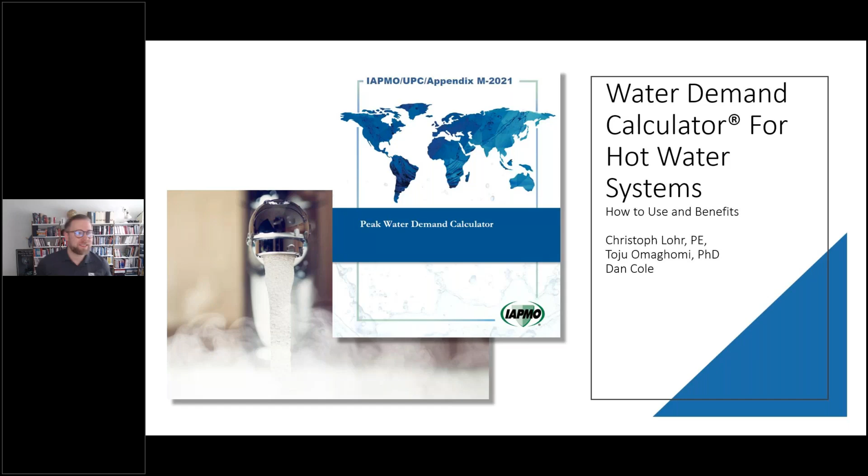Unfortunately, Dan is not able to join us today. We were hoping that it would work out, but he is actually attending the WE-Stand technical committee meetings.

And the WE-Stand is actually one topic that maybe some of you folks haven't heard of before. It really is a very remarkable ANSI standard that IAPMO develops, a bit of a stretch code if you will, that really tries to provide requirements to optimize water use practices while maintaining protection of public health, safety, and welfare. So that's right in the purpose of the document.

One of the things I've really loved about WE-Stand, I think from the engineering standpoint, is I see the opportunities to put this as there's lots of things about water reuse, the water demand calculator, hot water ratios, leak detection devices, and a plethora of other topics around water use.

And it's a really wonderful topic because it really balances well the public health and safety and the efficiency of water use in buildings. So sometimes we've had situations where standards have come out as an industry that have promoted practices perhaps that haven't led to safety, while trying to optimize water use or energy usage.

And this is really one of those documents that just, as I've come to spend the time here in my last almost 5 years at IAPMO, I have learned about this. If you're not familiar with it, highly recommend you guys go check it out. Max, thank you for putting that link in the chat.

So we'll just be Toju and I today. Here's a rough introduction or rough objectives that we have.

So we're going to spend a little bit of time on the introduction to the water demand calculator. How can design professionals use the water demand calculator, showing some of the results. And again, we're going to do a very high level today, so this is going to be a bit of a quick breeze through.

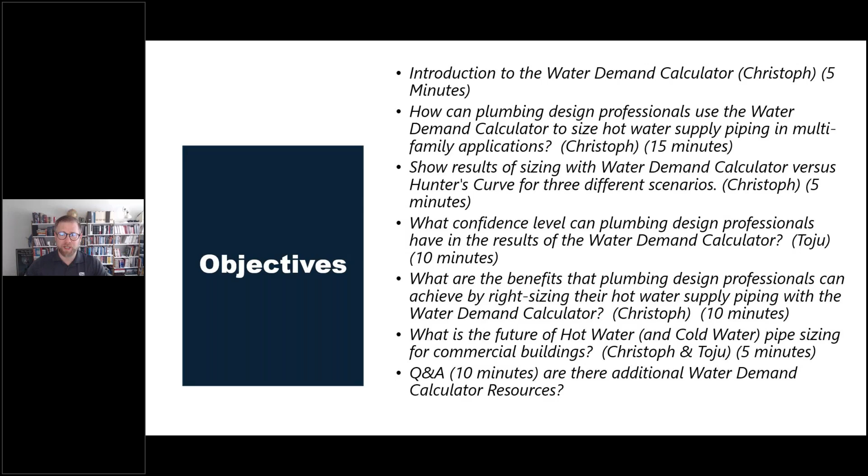And really what that comes from is a question that Dan Cole asked very early on, which is, what is the problem with the Hunter's curve? Even though the Hunter's curve has adjusted some of the flow rates and fixture unit values down because of more efficient water fixtures, the problem is that the fixture unit has two criteria inside that number: one is the flow rate of an individual fixture, but the other is a probability of simultaneous use. And really what it boils down to is that we're using something from the 1940s that assumes every home operates like a sports stadium at halftime.

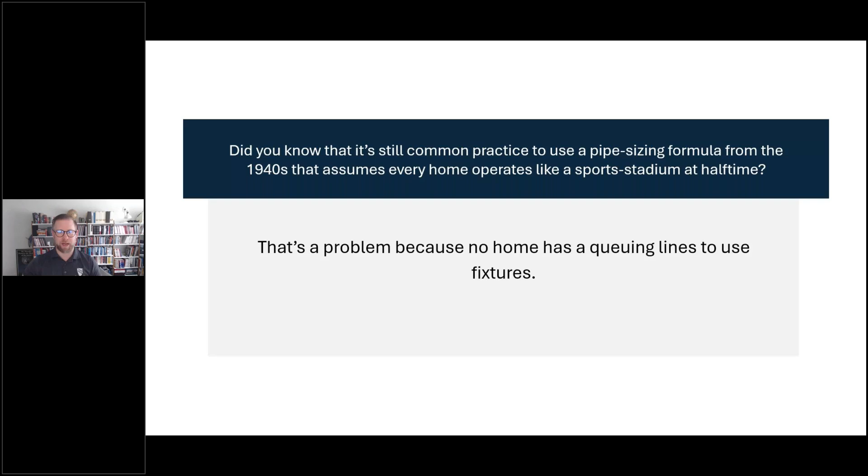So let's dive into that a little bit. Roy Hunter was commissioned by the U.S. Department of Commerce back in the 1940s to develop a way to size piping systems, a more standardized unit. What he came out with was BMS 65. Many of you have probably heard of that. And that particular report is what we've basically used as an industry ever since 1940.

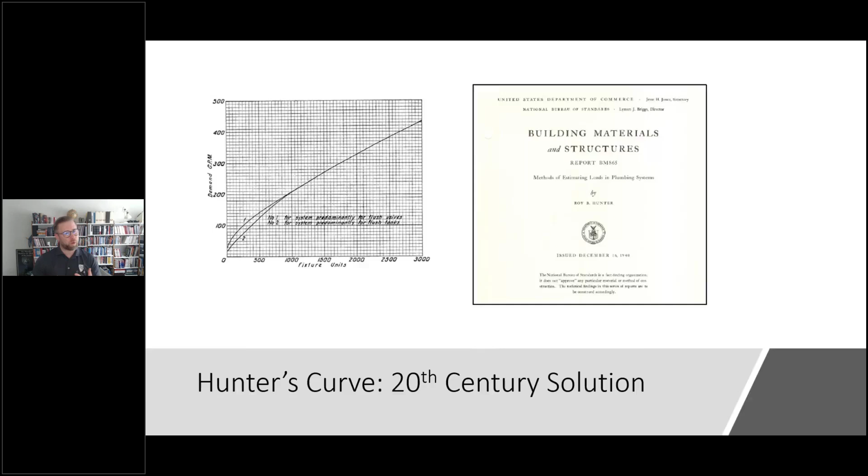Now, Dr. Roy Hunter had very limited means compared to present day in terms of what he could do in estimating peak flow rates. First off, we have to recognize he did not have a computer, let alone a calculator, to do any of the calculations with — he had a slide rule. And the other part is he had very limited data, and he had to make some assumptions to make the mathematics a little bit easier in terms of statistics and probabilities.

And that's all the information in terms of statistics and probabilities. Why I'm so glad Toju's here — she can definitely provide a lot more context to those questions if you have them. So put those in the chat now, and then we'll want to make sure to address those later on.

Now, obviously, that kind of a line really only happens in assembly-type occupancies. So we're talking about airports, maybe when they come in, sports stadiums most certainly at halftime, an opera house or a movie theater at intermission — you're talking about congested use. But Dr. Roy Hunter made that assumption for all buildings because he didn't have the data, and he had very limited means to making that calculation.

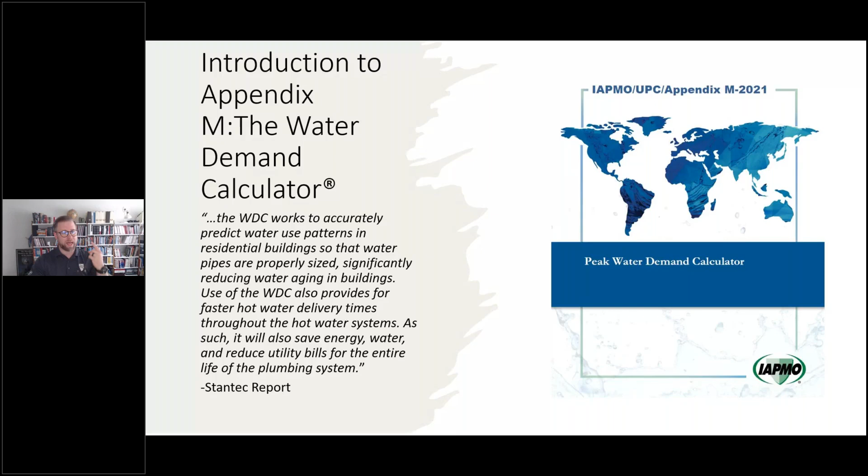And that's where we have this new way of sizing or estimating peak flow rates, which can be used to size a pipe. So let's touch base real quick and make a clarifier: the water demand calculator doesn't size a pipe directly. However, there are two main criteria when you size a supply pipe in a plumbing system - the available pressure, which is independent of the peak flow rate, and then the peak flow rate itself. That's what we use in the plumbing industry. We're not using average volumes or other things. We need to know what that 99th percentile peak flow rate is. Toju can give you more detail on that during the Q&A section.

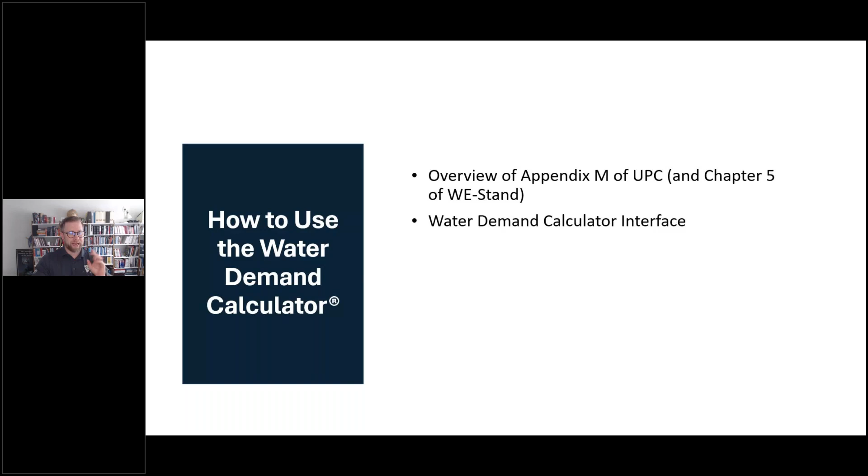So when you look at the water demand calculator, it exists in two particular standards. One is the IAPMO ANSI standard WE-Stand, now ongoing into the 2026 edition, and the other is the Uniform Plumbing Code, which we're just finishing up the 2027 edition, where it still exists in Appendix M. Also worth noting is that with these standards, there's a separate Appendix M adoption, which some states like Wisconsin have done as well.

Right now, the water demand calculator has been adopted in at least 10 states. There are 2 more states that have already approved it, but it won't go into effect until later this year. And then we have a smattering of other cities and jurisdictions that have adopted it, and some cities have started to mandate the use of the water demand calculator, which is rather interesting.

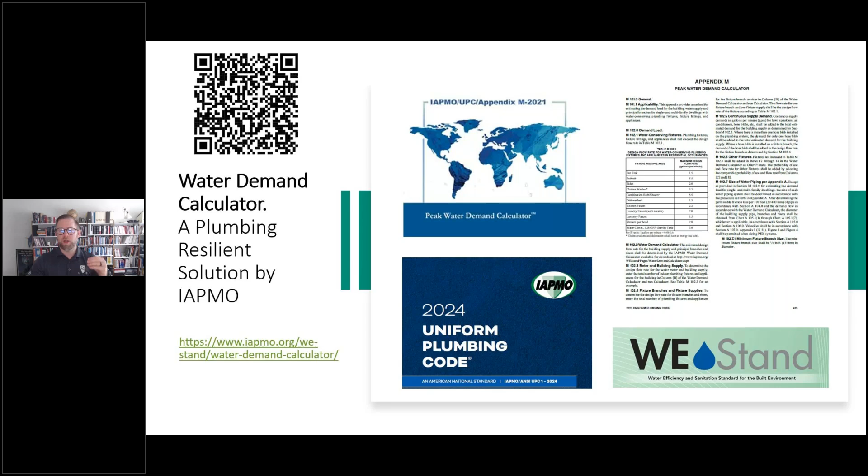Worth noting, just like other codes and standards, the water demand calculator is a free download. If you go to this website, there is a free version of the calculator, and there will always be a free version. In Excel, you do have to enable macros, but it's free to use. We have detailed instructions included, so if you need to work with your IT to get the macros to work, please do. But once you have that version, it's pretty straightforward to use.

So just some quick features and functions. Again, that QR code will take you to the website to download the water demand calculator, and it has a host of other resources around it. First off, make sure you're using the latest version, 2.2.

We have a project name and then a drop-down menu, which I'll address in just a moment. It will show the date you ran your calculation, your fixture groups, which include bathroom fixtures, kitchen fixtures, laundry room fixtures, bar prep fixtures, and then other. Then you have your individual fixture types, listed as such in each of those groupings. You enter your total number of fixtures.

The white cells are cells that you can go ahead and modify or edit. You have a probability of use, which remains unchanged or is automatically done, especially for multifamily that shows up there. If you're doing an other fixture, you can pull from the probability listed above. And then you have a fixture flow rate, GPM, that you can modify.

Now, at the current time, you can't go above the fixtures because the water demand calculator was built utilizing high efficiency fixtures as part of WE-Stand. However, we do have a committee looking at potentially elevating those peak flow rates for future versions of the water demand calculator. So stay tuned on that.

And then this last row is just a reference row in terms of what the maximum fixtures are. Here's where your outputs occur, including your total number of fixtures in your calculation, and what your 99th percentile demand flow is - that shows up right there. Your Hunter number, which references back to some of Hunter's curve pieces. The stagnation probability is a wonderful number that Professor Steve Buchberger and Toju Omaghomi came up with, especially in this age where we have to consider water age, water quality, and water management - that's a good number to look at. And then the method of computation.

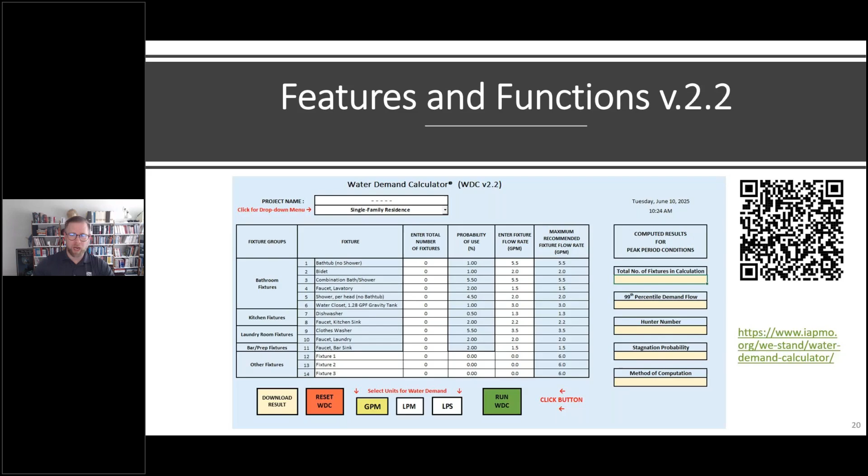Now, worth noting, there is the single family option, and there's a drop-down menu highlighted in red. If you're doing multifamily, like a line coming into an apartment complex or condo, when you select multifamily, you have to include the total number of apartments in the building and the total number of apartments in that particular calculation run.

That's vital because it changes the probability of use. One of the things Toju and Steve discovered when looking at multiple dwelling units is that the more dwelling units you have, the likelihood of simultaneous use goes down. So for larger buildings with multiple apartments, you'll see a lower flow rate output for more dwelling units when those bathroom groups are split into different dwelling units. That's a key function here, and that's really where that behavioral pattern from one home to another starts getting shifted.

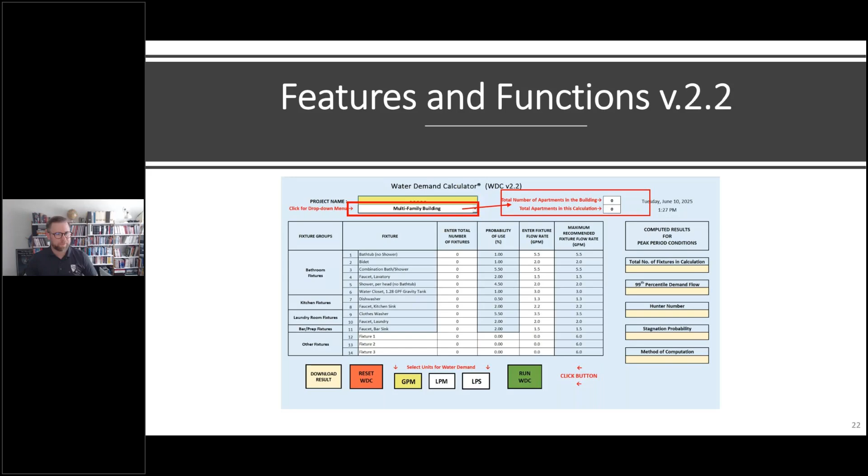Max, I just saw a hand raised, I think. I'm not sure—do we want to do questions at the end, or during? Yeah, we can do them at the end. If you want to type a question that pertains to a slide, the easiest way to relay that is to type it into the chat, and I'll see if I can keep up with those, or we'll get back to everybody if we don't get to a bunch of questions by the end.

Perfect, so just a real quick summary—we had to condense it for the purposes of this presentation. The first thing when using the water demand calculator is recognizing that it currently only applies to residential buildings, whether single family or multifamily.

If you have a mixed use building with shops on the bottom and apartments on top, you can use the water demand calculator for the apartments upstairs, for those areas downstream. However, for your combined water service entrance feeding both, you take your water demand calculator for the residential occupancies, then use Hunter's curve for the commercial spaces, and add those numbers determined independently together to come up with your total flow rate for the combined service serving both the mixed use and multifamily.

We are working on retail spaces too, so hopefully soon we'll have a way to package it all up in the water demand calculator, but it's going to take some time. More on that later.

Again, you need to have water conserving fixtures, and riser diagrams showing the pipe segments. I highly recommend doing that riser diagram to show your peak flow rates segment by segment. Then it's just following Appendix A from the UPC, the longest length method—you do your friction loss calculations based on available pressure and longest length to get a PSI per 100 lineal feet. You do your pipe sizing chart, plug in that water demand calculator demand based on your available flow rate for your pressure loss PSI per 100 lineal feet, and that helps you select your pipe sizes.

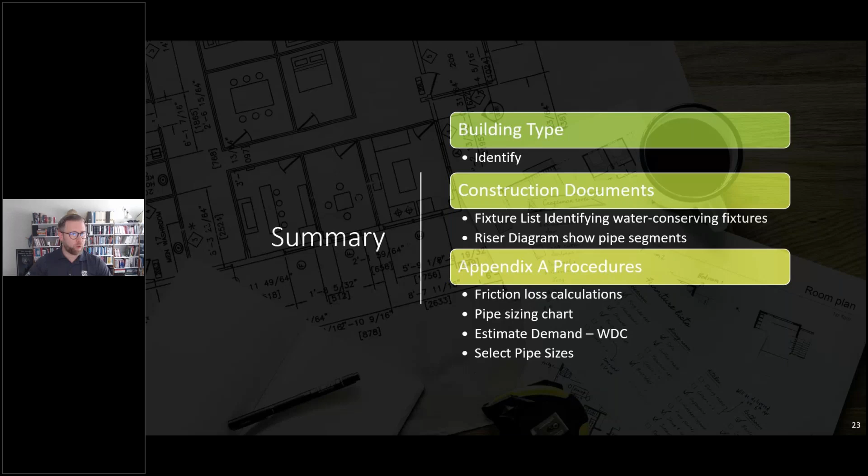So to show a quick example of how that works—if we're doing a pipe sizing method for hot water, in this case utilizing a pressure drop of about 15 PSI per 100 lineal feet, and using the charts in Appendix A, you'll see that a half-inch line has a maximum hot water demand GPM of 3.5 GPM.

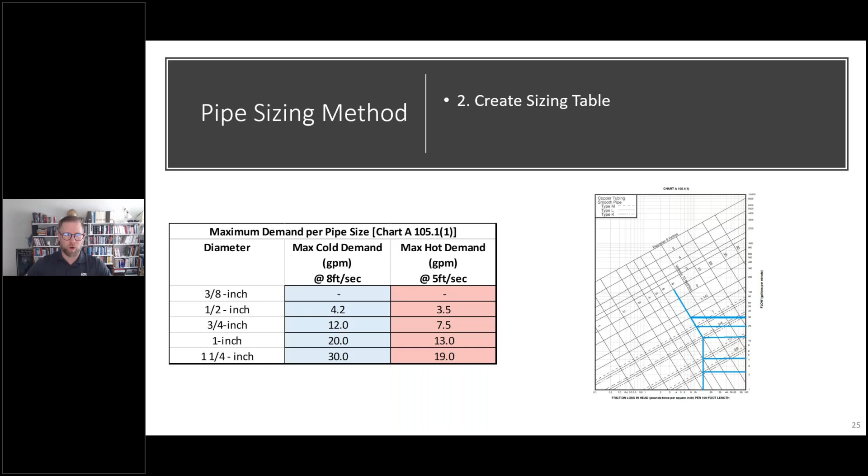Again, you're lowering that feet per second due to velocity limitations of copper in this case. 3/4 inch goes up to 7.5, 1 inch goes to 13 GPM, and 1 1/4 inch goes up to 19 GPM. So when sizing your hot water supply coming out of the water heater, you'd put in those flow rates for each segment of pipe, then go back and refer to the chart to come up with your size.

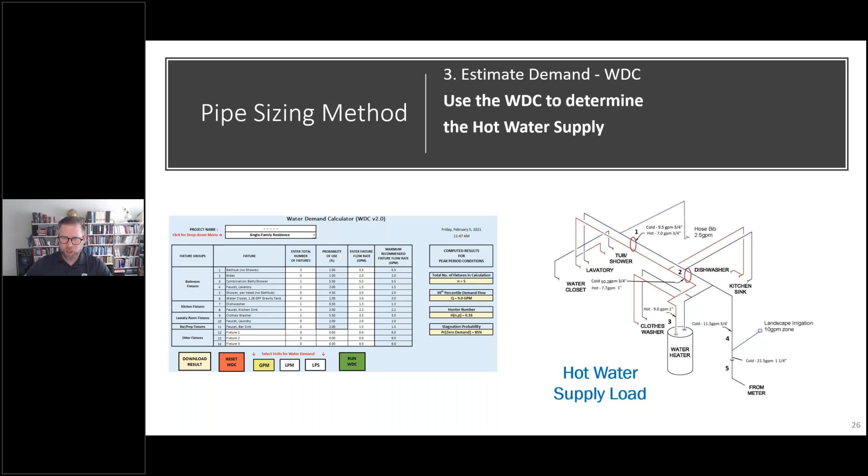So for pipe segment 1, which is the combined main serving the lavatory and the tub and shower, you have 7 GPM, so that's a 3/4 inch.

Going back a little further, that combined main for that bathroom plus the kitchen sink, the water demand calculator estimated at 7.7 GPM, which equates to a 1 inch pipe in this particular example.

Going back further, getting closer to the water heater, you have the clothes washer, which gets you a GPM of 9. That hot water pipe size would be 1 inch. That's just looking at the chart we created before, and what the water demand calculator creates for each one of them.

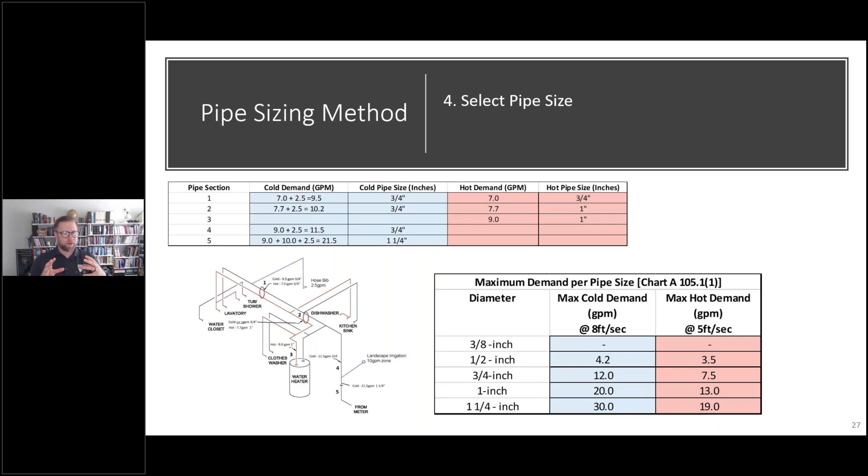Now, when you have just an individual dwelling unit or single family home, typically the pipe sizes mimic pretty closely to what Hunter's curve does. But when you start scaling up to multifamily, you're going to see reductions in pipe size. This is a particular example.

That QR code takes you to a YouTube video. Our colleague Randy Lorge, a master plumber out of Wisconsin, did this for our IAPMO San Antonio conference in 2023, and we got a recording of it. He goes through and breaks this down for a whole specific multifamily application for cold and hot water.

But looking at pipe segments 12 through 20, just the hot water side, when you look at the total potential simultaneous use for each segment of pipe, table 610 and appendix A by itself, which basically follows Hunter's curve sizing, estimated a 1 1/4 inch line coming out of it was necessary. The water demand calculator only required a 1 inch line.

So generally speaking, when you're doing multifamily, about 95 to 99% of the time the peak flow rate that the water demand calculator comes out with is going to be lower than Hunter's curve. Sometimes you get a bit of an anomaly where the water demand calculator is slightly larger, but generally speaking you're going to be smaller.

Where you really see this, let's say you have a 100 unit apartment complex, the cold water line coming in may go from a 4 inch down to a 2 inch. So let's say your hot water was a 3 inch makeup to the water heaters, you might be able to get away with a 2 inch or 1.5 inches.

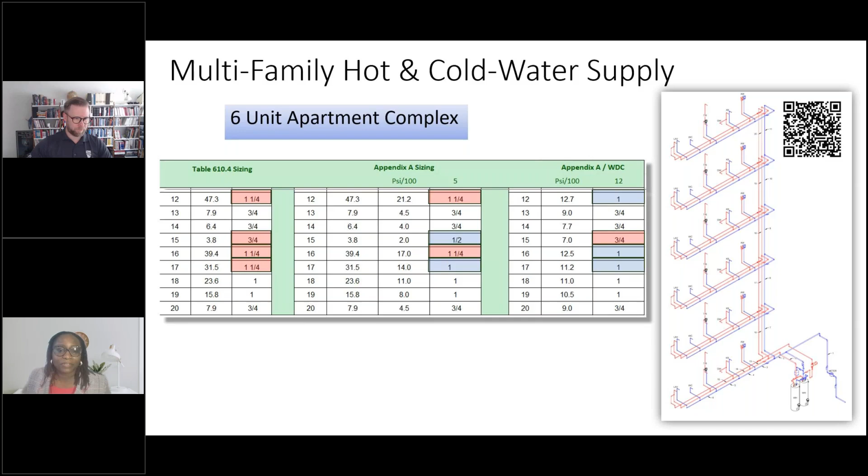So everybody knows about Hunter's curve, and then we come out with this water demand calculator, and it's not a simple plot. Everybody was asking why don't we just have a straight line? Well, we can't, because we found out that depending on the size of the building, it requires a different method and different parameters.

And so people are concerned because we now have these very small numbers, and they're like, how did we get it? Next slide.

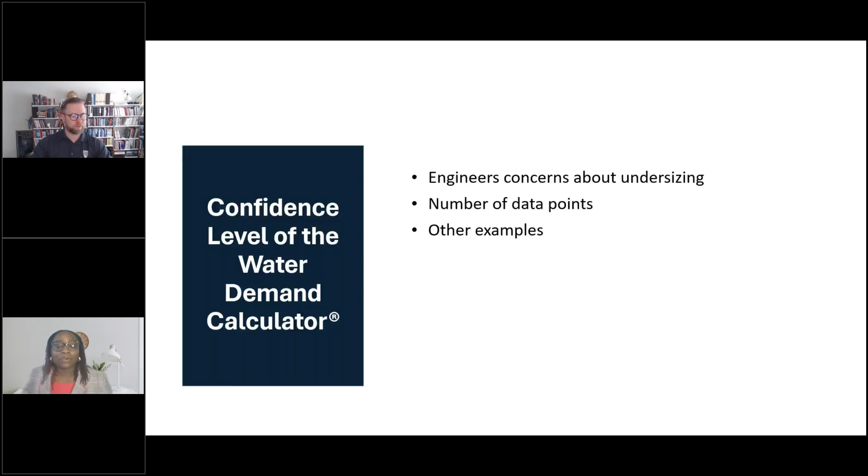So what went into the water demand calculator was data from over 1,000 residential buildings across 9 states, 62 cities. We looked at where and when water is being used in these homes. The data told us that at 7:30, the faucet is on, the shower is on, the toilet is on, so we can see what is happening at individual fixtures and for how long they were used, and we were able to calculate the probability that water is flowing at the individual fixtures.

We also used the same data to assume that each residential building is a unit in a multi-apartment building, and we found that as the number of units increases, the probability of peak hour use for these fixtures reduces, because not all of the homes are in simultaneous use at the same time, as we would have in a stadium where everybody's using the fixtures at the same time.

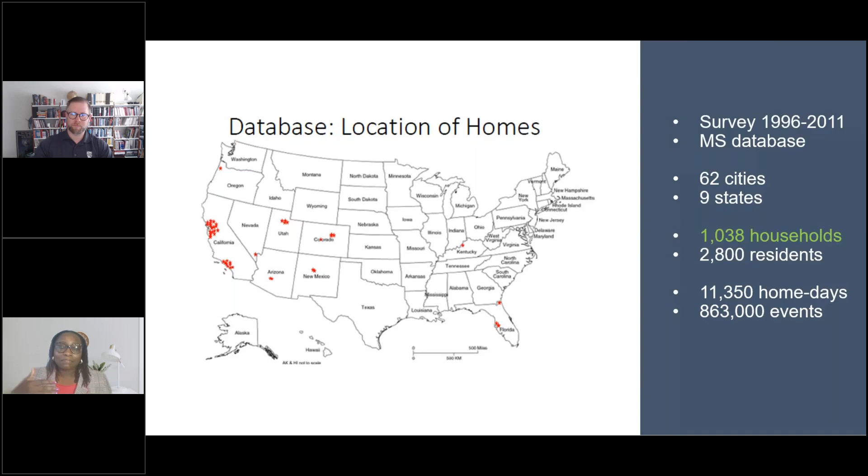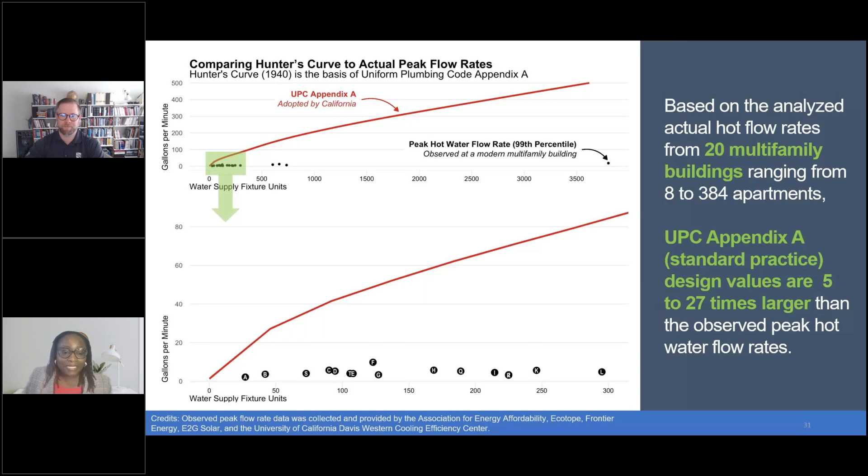In this plot, we compare what is being measured against what it was designed for, which is red, to the water demand calculator, which is blue. What was measured is black. The highest we see is about 20 GPM from a building with 384 units. The water demand calculator is at least close to reality compared to the red lines, which is what they would have used to design the system. Depending on the size of the building, this difference increases, which is what we're noticing. At the end, the last 4 buildings, they could not even put the data point for the design on the plot because it was way out of range.

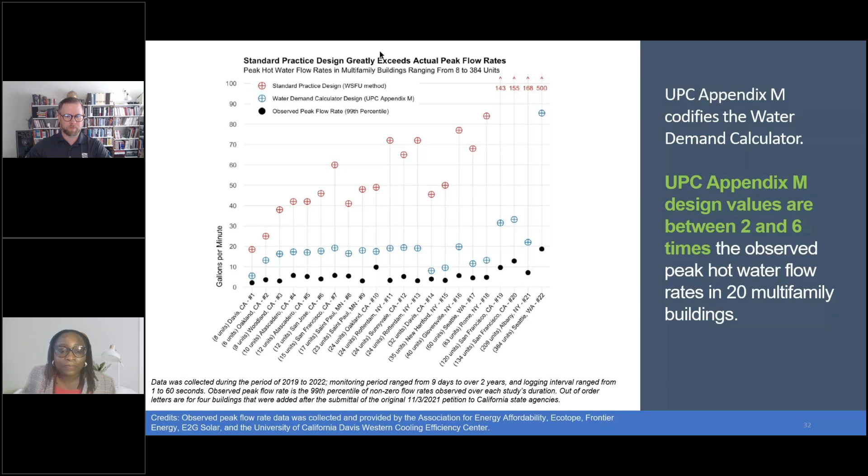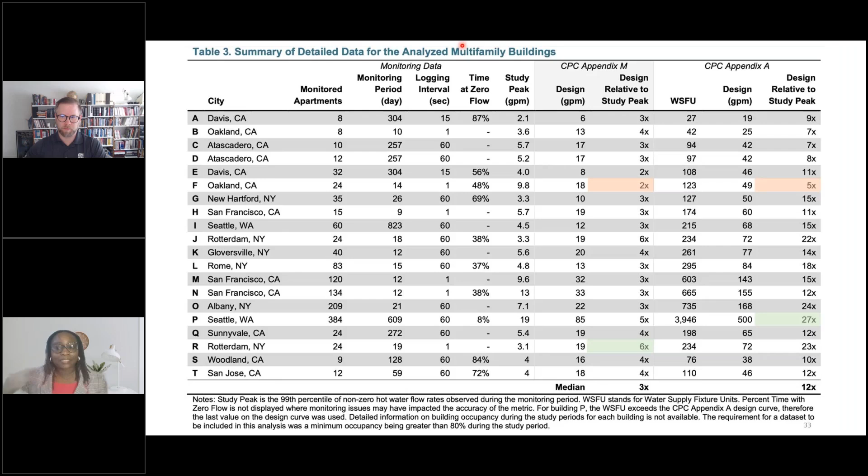I want to draw your attention also to the time of zero flow, because in these residential buildings, most of the time people come and go, and there's a whole lot of times with zero flow in the building. But if we go to building P, Seattle with 384 units, that was the building with the least probability of zero flow. That's because when we have all these units, there's a whole lot going on in the building—very few times water is not in use, even during the peak hour. Just so we know, because Christoph mentioned probability of stagnation, which is one of the results the water demand calculator gives you.

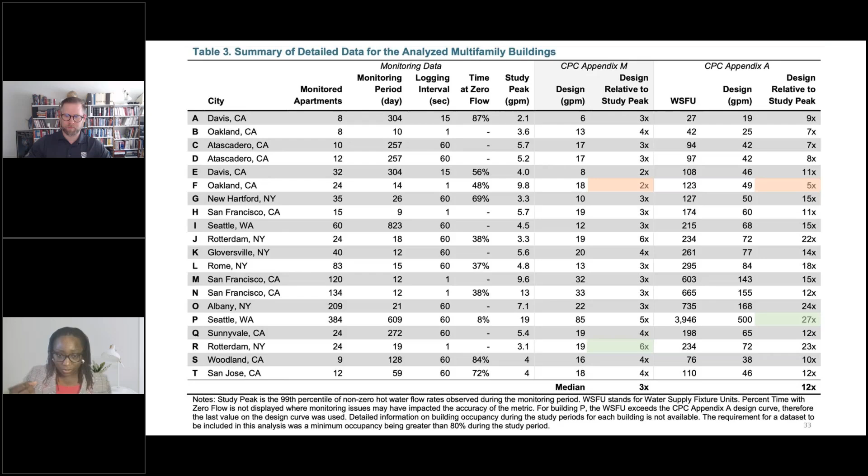This result we just shared is what went into California adopting the water demand calculator for their energy codes. You can access the reports and everything about it, because we just showed you one table—there's a whole lot that went into it, looking at the 20 buildings and everything that happened in them. You can scan the QR code or the link to access the report.

And just want to add, Toju, this particular report was really well done by 2050 Partners, Gary Klein, and a number of other folks, the Association for Energy Affordability in California. Just a big kudos to them for putting this whole thing together. That's a free download.

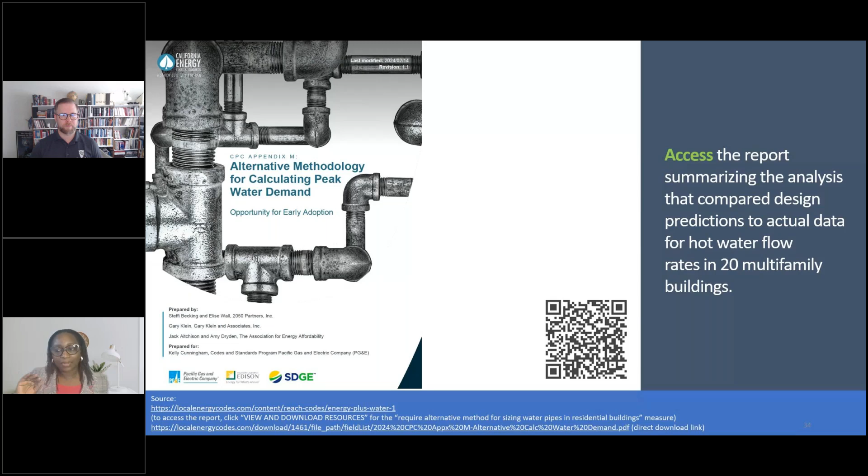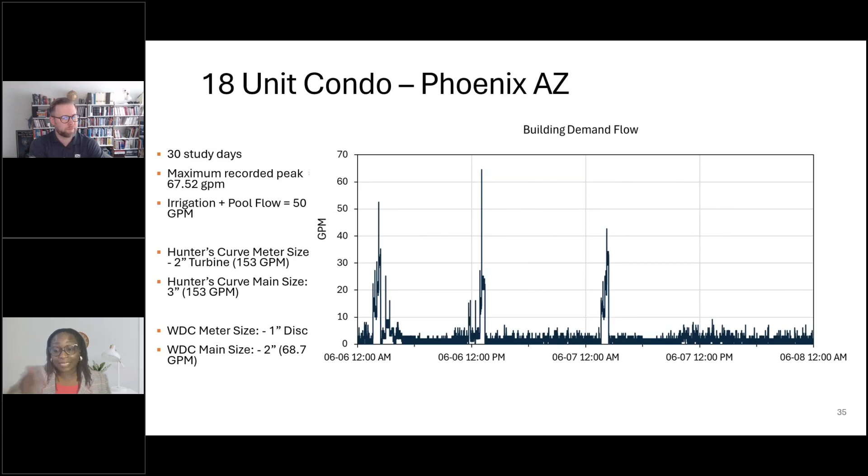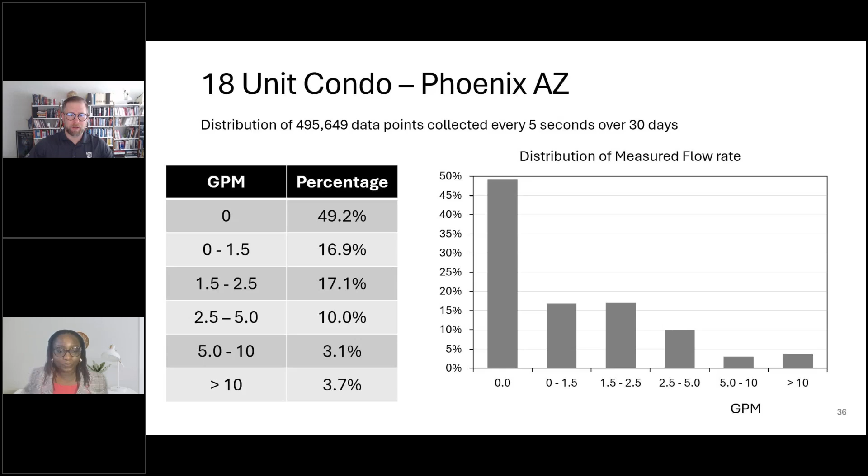Definitely. So I think Toju did a great job summarizing the overall confidence level that engineers can have with the water demand calculator. And I think just to hone in on one part of what Toju presented, the water demand calculator always, in essence, estimated underneath what the Hunter's curve would estimate with the fixture unit method, sometimes by a factor of as much as 10 times, but it was always still at least a 2 times safety factor from what the actual flow rate was to what the water demand calculator estimated the peak flow rate to be.

And that's really vital. That speaks to the good work that Dan, Professor Steven Buchberger, and Toju all did when it came to the thoughtfulness put behind this, to make sure that we're not going to end up in a situation where a system is undersized. Again, we call it right-sizing because we're getting closer to what the true peak flow rates are, but we do not want to be underneath it. That's a vital piece of the thoughtfulness put into this, to make sure the system is operating as efficiently as best we can.

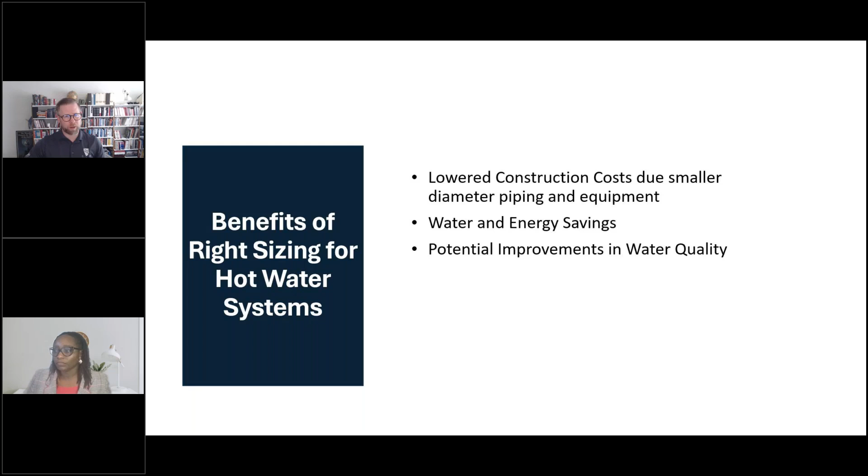Now, when it comes to right-sizing, especially in the realm of hot water, we have some really great potential for benefits that come from this approach. First off, worth mentioning is the Stantec report. IAPMO commissioned Stantec back around 2020, 2021. We have a free report accessible from that previous link to the water demand calculator that I showed. This particular report, the Stantec report, looked at the construction cost savings.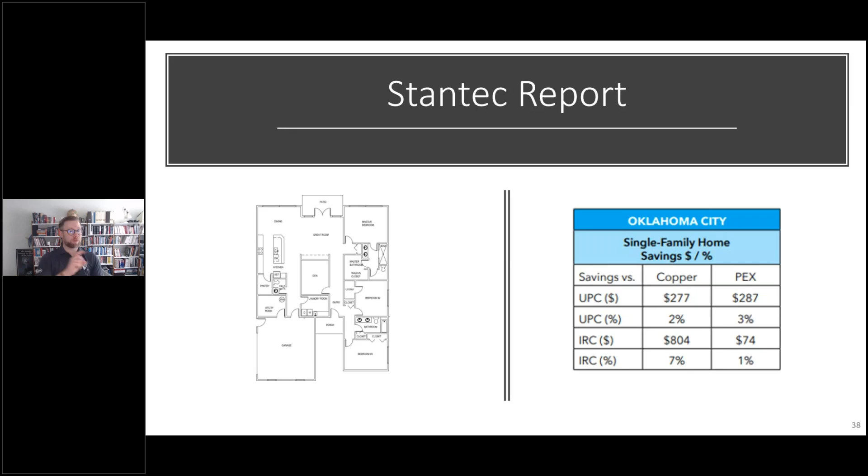Now it looked at hot and cold, but you can definitely derive what the hot water savings would be by looking at lowering on an individual dwelling unit basis. And that particular report on construction cost savings looked at multiple markets - high construction cost markets to low construction cost markets, in terms of size of the cities of those markets - and looked at different types of single family and multifamily applications.

I think for this audience, probably the multifamily numbers are going to be of definite interest. And again, this assumed individual water heaters per unit, I do believe, not a centralized hot water system, which those savings could be much larger too. It's not unheard of for multifamily, especially if you're having hundreds of units of apartments, to have 6 figures or more in terms of overall pipe material savings. So that's a great opportunity to really have a positive impact by utilizing this.

Now, the other report worth mentioning, the other approach, is the sustainability savings. When you look at water savings that come from right-sizing, the big one we like to focus on is the elimination of structural water waste. Now, there have been some folks out there that question this, some entities that have said, well, is there any water savings actually capable from this? Well, yes - there's actually at least 24 peer-reviewed studies out there that we have listed on a separate subpage of the Water Demand Calculator webpage I mentioned before.

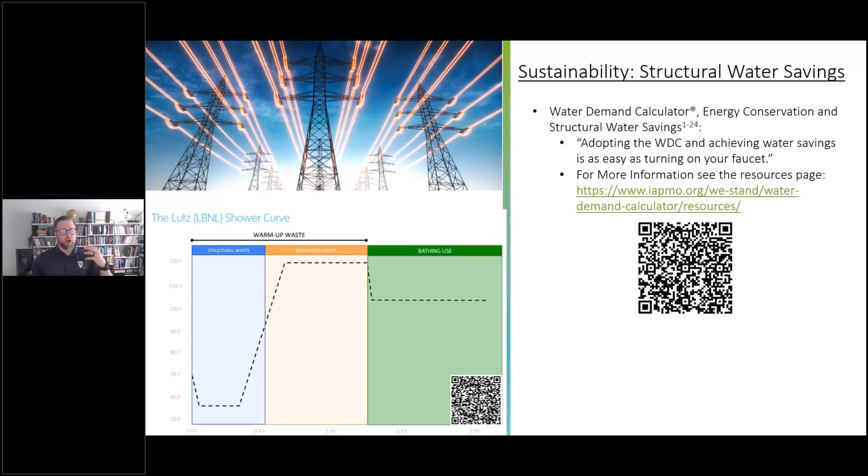So the diameter, which the water demand calculator calculates, is a key component of this. If you calculate for single family homes or multifamily dwellings, even bringing that hot water source through a recirculation loop pretty close to the shower - IAPMO commissioned Arup, and there's been a number of other studies done as well - and when you compare the numbers for each one, the potential savings is around 500 gallons per year per dwelling unit, which is what everybody kind of revolves around.

So what that means is just by right sizing your hot water systems inside the dwelling unit, the potential for savings equals an outdoor hot tub worth of water saved every year, just by not having that much water going down the drain.

So there's certainly more things you can do, but that's three different studies that have all started coalescing around similar numbers. The other thing worth noting is that those numbers are based on only needing to displace 100% of that volume difference. What real-world studies and research are finding, like what Gary Klein has indicated, is that the actual value of volume displaced is somewhere in the range of 1.5 to 2.2 times that volume - so roughly around 2 times.

So in essence, as that pipe cools off and you start introducing hot water to it, that cooled off pipe material actually decreases the temperature of the hot water coming through it as well. So some of these numbers could actually be on the lower end of the spectrum. It's just worth noting that there's a lot of potential in this realm of structural water waste that we're reviewing, and that's included in these numbers.

But again, three different reports, all summarized there, all kind of ended up in a similar place. And the reports are also looking at three different sources, like the Stantec report that we had, and these other reports - they're all estimating somewhere in the range of $500 to $2,000 in pipe material savings per unit as well. So lots of potential there.

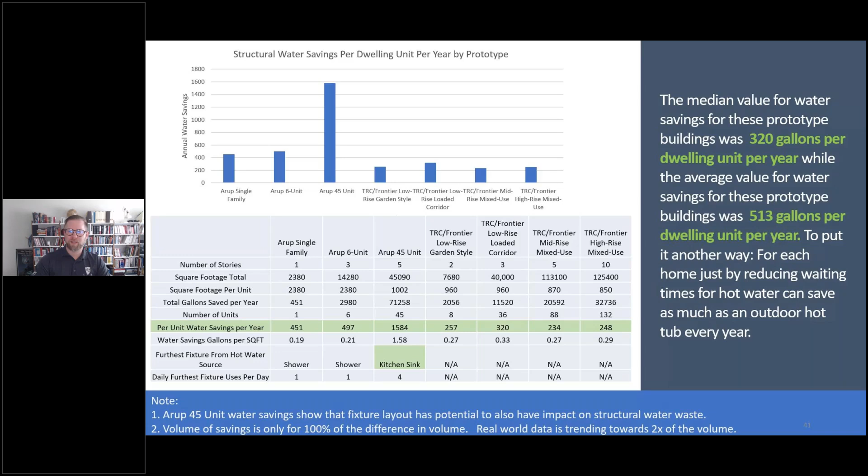The California Energy Code looked at this quite a bit, and they looked at the water savings, but they also included energy savings from right sizing. Again, there's a water-energy nexus - it takes a certain amount of energy to deliver the hot water from the building, from the water purveyor, to use. So by right sizing, you're saving some of that energy as well.

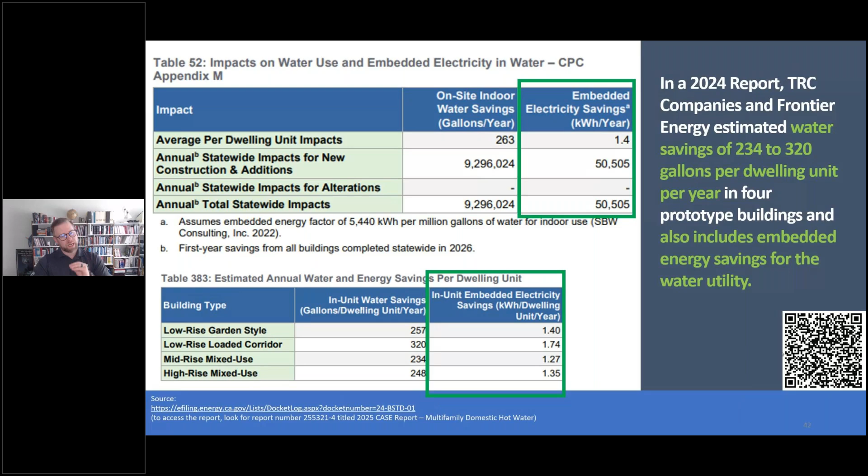These reports indicated that. And the other piece that's really unique here is that this is one of the few instances where a sustainability benefit doesn't cost more at the start - it actually costs less. So you get some funny results, like from the report I've been referencing here from the California Energy Commission, the benefit-cost ratio is infinite, because we're starting off at a lower number than what typically happens in sustainability initiatives where they cost more upfront.

So again, you have these really a situation where the water demand calculator broke the benefit cost calculation, which is kind of a funny piece.

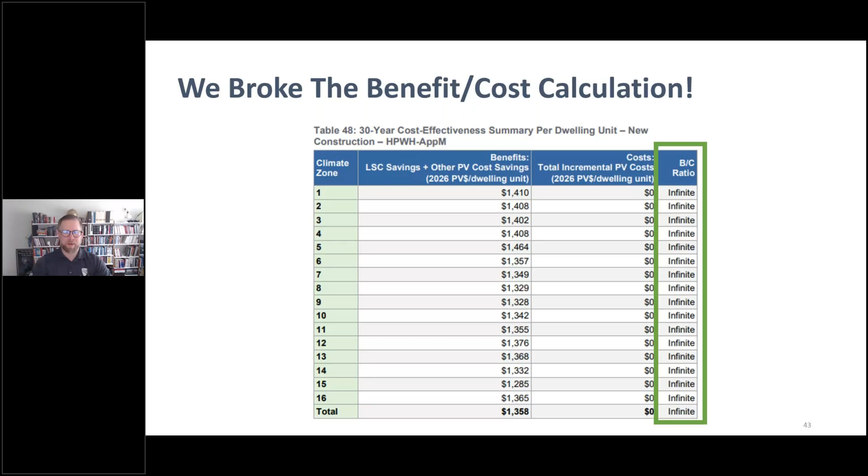Diving into that energy bit, the energy savings piece a little bit more, I want to go back and reference one of the last times I presented for Coffee with Caleffi, specifically the 10 things to know about domestic hot water return design. We touched on the potential difference in terms of pipe sizing and the energy distribution from that. If you want to learn more about how to size hot water systems, the return side especially, and how the energy losses go, feel free to watch the whole presentation. Definitely seems like a lot of folks have.

Stealing one slide from there, I just want to point to, to visualize that difference. So let's say you had a situation where normally you would have had a 4-inch water main coming into a multifamily building, let's say this was probably like a 100 or 200 unit apartment complex. You had a central hot water system on the roof, which is very common for high-rise applications.

That 4-inch hot water main would have had about a 6.49, assuming, again, I'm just picking a number, not making a recommendation, just trying to show the difference here at the low end. So it would have had a 6.49 BTU per hour per foot heat loss, heat dissipation from that.

And let's say using the water demand calculator for the supply side, you could have gone down to a 2-inch based on the parameters for this particular building. If you were to look at that difference, again, we're going to assume 500 feet of this. It might be more, might be less. Again, just trying to use some round numbers to give an example here.

If you look at that difference, you're looking at about 10,000 MBH difference between one versus the other. So that equals about 2,000 US homes during the winter in terms of the energy difference and the energy savings there, just by right sizing within the building.

So this is one area where, again, we want to do some more research, but there's an opportunity here by right sizing to have significant energy savings on your hot water side, especially as you start increasing the temperature, let's say, for things like waterborne pathogens.

And that's kind of the next frontier of what we're going to be working at IAPMO, is looking at a paper to try to quantify some of the water quality improvement potential of right sizing, because one of the benefits, as Toju has mentioned, is that stagnation factor. By lowering it, you're certainly going to have lower flushing needs from a water management programming standpoint, but you also have that opportunity to just overall reduce the water age as your water is turning over more readily.

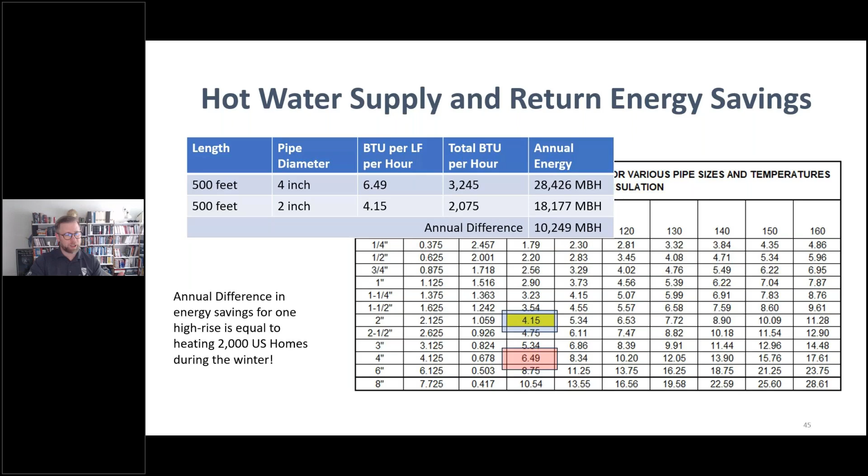So we're looking to get a report on that out here this year, hopefully. So again, there's construction cost savings, there's sustainability savings in terms of water and energy saved, and there's also that potential for improving water quality due to shorter water dwell times.

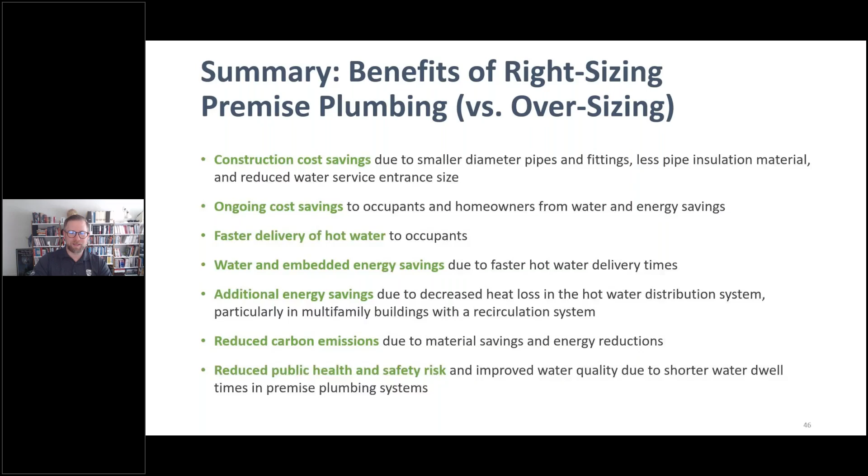So let's switch gears, and Toju and I will tag team this section here. So what's the next steps with the Water Demand Calculator?

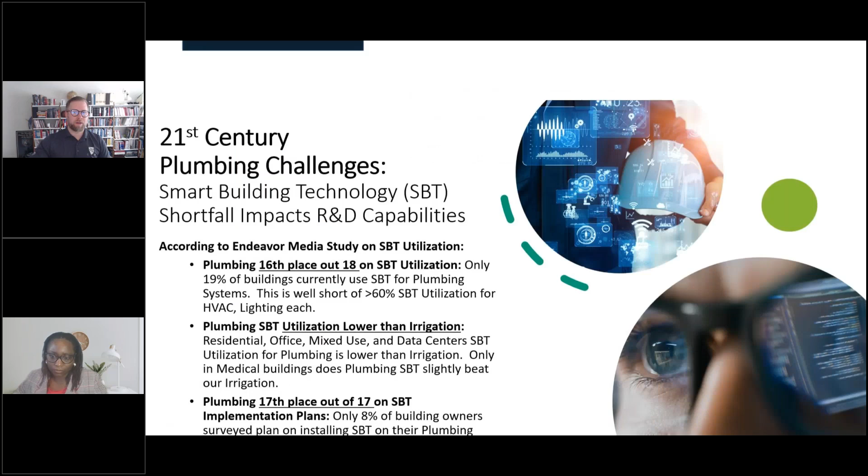So one thing worth noting is that when you look at smart building technology, SBT, usage in various commercial buildings, one of the big challenges right now is the fact that plumbing is basically at the rock bottom in terms of smart building technology usage, or even the potential plans for implementation.

Endeavor Media did a study back in 2022, and I had the privilege of being a co-panelist at the NIBS conference with Wanda Lau. We talked about some of the latest things in terms of data and water usage inside buildings. She was with Endeavor Media at the time, and she presented these findings. And when you started looking at her slides, it was pretty striking, and not in a good way for plumbing. She definitely shed a light on a problem.

When it came to actually using smart building technology, plumbing was 16th place out of 18. And really, it was only 19% of buildings currently using any kind of smart building technology for plumbing systems. This was well short of the over 60% smart building technology utilization for HVAC and lighting.

The plumbing smart building technology utilization was actually even lower than irrigation systems for things like residential, office, mixed use, and data centers. Only healthcare had a higher smart building technology usage, slightly beating out irrigation. In terms of implementation plans in the future, only 8% of building owners surveyed planned on having smart building technology on their plumbing systems. Almost 63% had absolutely no current plans to install any kind of smart building technology on their plumbing systems, which includes hot water systems.

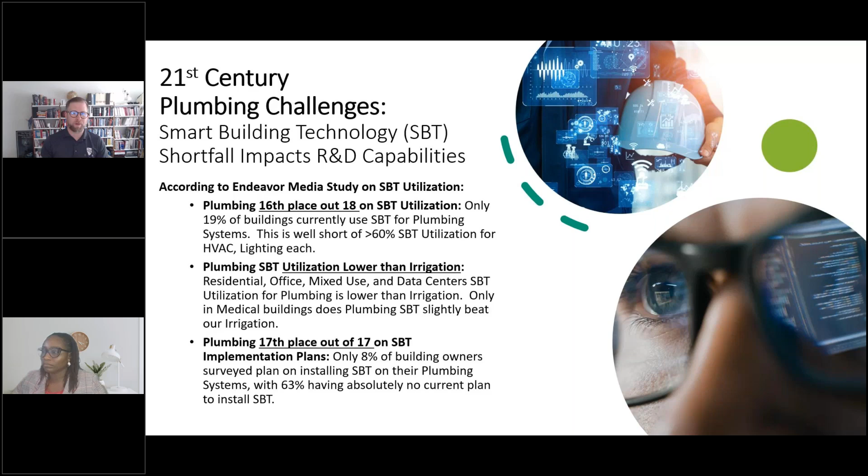So we had a huge shortfall in any kind of management, and there really is a need for someone to go back and measure it, which is what IAPMO has been doing. The approach we've taken has been to work towards a general commercial calculator. Right now we're collecting a lot of data towards that, and our goal is to start subsetting that data into different buckets.

The data we need has three labels. First is macro data. Macro data is what we're determining as any kind of peak flow rate into, let's say, a water meter or the water supply coming into a building, or into a water heater and out of a water heater, when you're looking at multiple fixtures over a large portion of the building. We've kind of dubbed that as macro data.

Micro data, on the other hand, is when you start putting sensors on individual fixtures, on an individual shower, on an individual lavatory. That's what we're determining as microdata. So we're looking for macro and micro data opportunities, and Toju is going to touch on that here in just a moment, what we specifically need, especially on the macro data side. The third verbiage you're going to hear us use is what's known as metadata.

So we need a total list of plumbing fixtures. Anything downstream of that sensor, we need to know the type and the total number of those types. For example, we need to know how many water closets, how many showers, how many lavatories, how many sinks, et cetera. All of that's key because we use that macro and micro data along with simulation and looking at that metadata. The simulation could be like an analysis, and that gets us to that water demand calculator 3.0, if you will, for commercial buildings. That's what we're working towards right now.

So Toju, do you want to touch base real quickly on some of the specific needed data, especially the macro data when it comes to the water coming into a building or from a water heater?

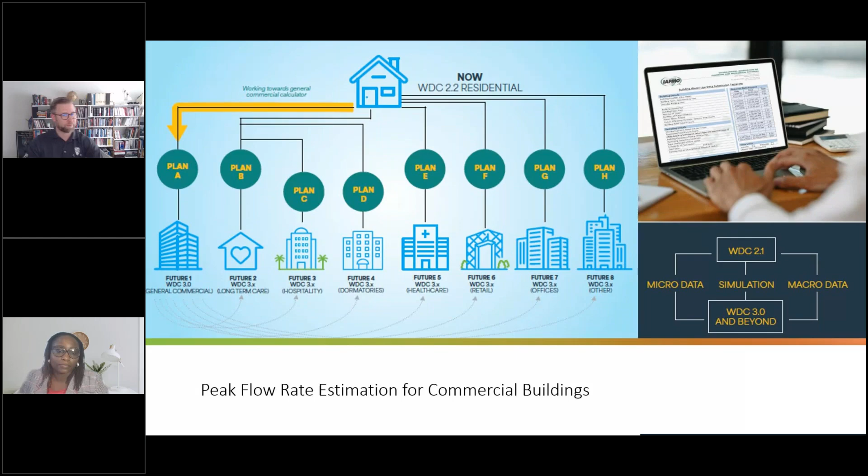Sure. So what IAPMO is doing right now is we're looking for people with buildings to give us access so we can collect data. We know that collecting data at the individual fixtures is expensive and cumbersome, so we'll start with the water at the main, or if we're looking at only hot water use, after the hot water heater, and measure the total flow going into the building. We would need to monitor for 3 to 4 weeks. We'll prefer logging intervals below 60 seconds, and then we need to know the number of fixtures in the building.

And if we're looking at something like hotel or office buildings, we would like to see if occupancy is affecting this peak water demand. At the moment, we need about 140 buildings per type to be 95% confident that we have a representative database, and that is what we're going for. So if you would like to partner with us, next.

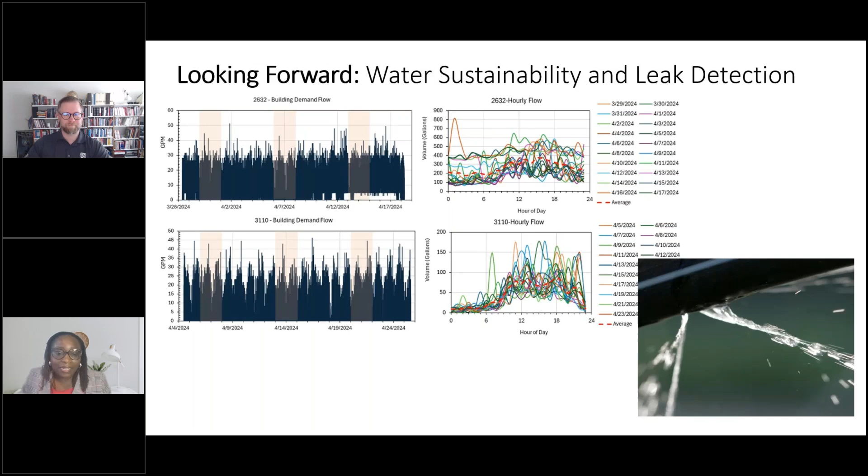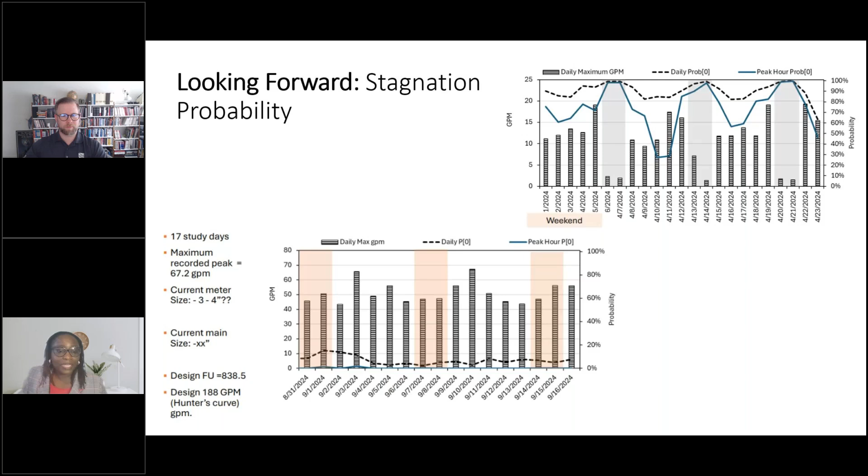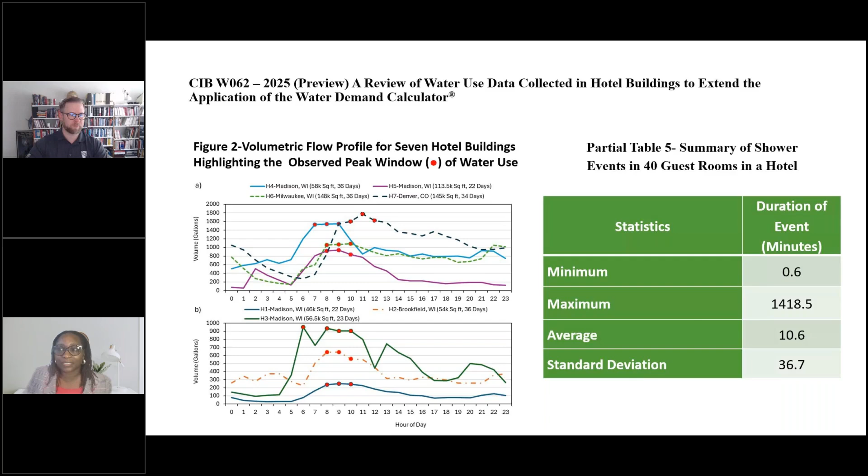Thanks, Christoph. One thing we also noticed is that the peak shower use did not coincide with the building's peak water use. Shower use was mostly in the evening, but that's discussion for another day.

Now, this is a summary of buildings that we have gotten so far. The red triangle represents the average of the daily maximums, depending on how long we studied. We studied for between 14 to 77 days at various sites. The green is from mercantiles, which is like the grocery stores. The blue in the middle is hotels. The white is higher ed, those are university campuses. And the red is healthcare.

Those are hospital buildings, and we see the red, and then the black dot is the design GPM that they had for the building based on the fixture details that we have. For the mercantile buildings on the extreme left, there's a small difference, but that's because when you're looking at a very small building, there's not too much variability in your flows. As the size of the building increases and the number of fixtures increases, that's when we see all the variability in the flows. And for the hospitals, there are a whole lot of fixtures that they are not even using, so we see that very great difference.

But if you look at Healthcare 8, you think, well, that's an anomaly. That was an outpatient facility, so it runs basically like an office. You can see it's similar to the very last data point on the extreme right, which is also an office building. So these are just information we are getting based on the data, telling us what is happening in the different buildings. We are using all this information to see how we can get a simple, single water demand calculator, version 3, that will apply to non-residential buildings.

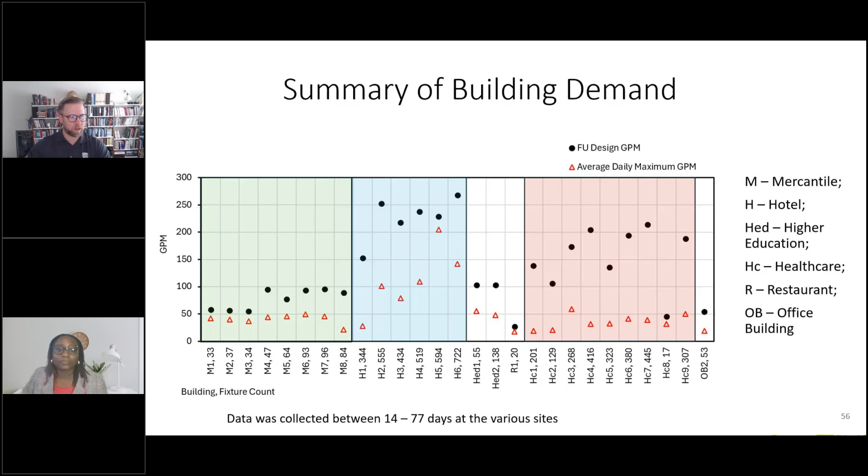Excellent, great summary, Toju. And again, the peak flow rates there, that's the average daily maximum, which is also a higher number than what the actual estimated 99th percentile peak flow rate was. Correct, Toju, if I recall correctly? Yes. Excellent.

So just to wrap things up, we're going to go through these next few slides a little bit quickly. If you have a building owner, or if you are a building owner, or if you're an engineer, installer, or even a code official, and you have a recommendation for us to come in and collaborate on some of this research, we have sensors that we can loan out, or that we can look to have either our staff or volunteers install. There's some really great benefits in terms of any water savings or stagnation probabilities that we're able to determine.

We have NDAs with a number of Fortune 500 companies already, but we're always looking for more. As Toju mentioned, we need like 140 buildings. So the more people we can get in, more building types we can get in there, we start really filling in this stuff. It's definitely going to take some time, but we're making some great strides here over this last year.

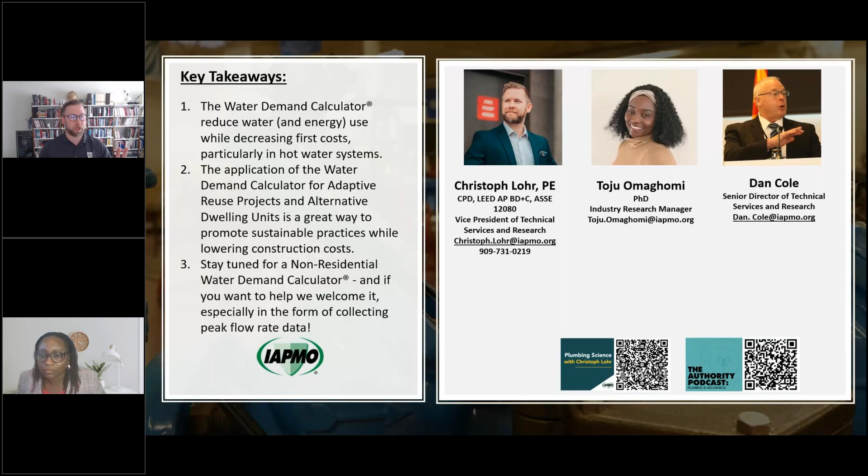I think you had mentioned New Jersey and Wisconsin. Those are two states that don't adopt the UPC, they have their own plumbing codes. Actually, it's 2 of 4 states that have their own homegrown plumbing code, but they also have the water demand calculator adopted.

And then we have the city of Phoenix, where I live. They are looking to officially adopt the water demand calculator, which is wonderful news here in Arizona, because we have issues with the Colorado River and our water supply. That's definitely not going to solve the problem, there's no silver bullet for that, but it's definitely going to help and be a positive in that regard.

And then Castle Rock, Colorado actually became one of the first jurisdictions in Colorado to approve and mandate the use of the water demand calculator. That was interesting because it came from their water department. We've worked with a number of water departments, such as Portland and Charlotte, because there are different places that want to start using the water demand calculator. And that comes from AWWA Manual 22, M22, which revolves around water sizing and meter sizing.

That document actually recommends the water demand calculator for the sizing of service mains and water meters for residential occupancy. So that kind of goes to the part that even if your state doesn't adopt the water demand calculator, there's still opportunities to use it.

Some states, like North Georgia, the Atlanta metro area, the North Georgia Metropolitan Water District, Water Conservation District, they've actually allowed the water demand calculator, kind of circumventing the building officials there, because they want every opportunity to save water.

The other option is, if you live in a state that hasn't officially adopted it, you can always apply for an engineering variance. Some of the most early uses of the water demand calculator definitely fall in that bucket. There are places like New York where it's been used, and in Texas, where every city has its own plumbing code, much like Arizona. We're kind of those two anomaly states that do it a little differently. And other places across the country.

Unfortunately, much of the Energy Star data tends to look at it day by day, or even some of the water purveyors get down to 15-minute increments for water usage at best, from what we've seen. We need to get less than 60-second increments. And really, when you start looking at the data itself, what you start noticing is that the volumetric flow rate—that a lot of the utilities and Energy Star are looking at—versus the peak flow rate.

Toju, correct me if I'm wrong here, but they're a bit disjointed—the peak flow rate and the total volume usage aren't necessarily in line. We've seen a lot of cases where the peak flow rate is highest on days that had lower water use for certain building types. It just kind of depends—sometimes they do go up together, but not always.

So really we're looking at a data requirement of having something less than 60-second increments. Honestly, the data we're looking for at best would be like 2 to 5-second increments, which is very, very granular compared to what most of the water utilities are looking at.

It's much more granular than what's traditionally used by water utilities, but that's what we do as professional engineers of mechanical plumbing systems. Basically, that's the level we're looking at. It becomes tricky when looking at these data sets - we've looked through a lot of them. Toju, Dan, and I are looking under every rock. That's why at IAPMO we have sensors we can loan out, and we're putting sensors in buildings, non-intrusive, you don't have to cut into pipe. They're mounted externally, and we've been using those sensors to get the data resolution we need, making sure the peak flow rates jive with the calculation tool. Toju, anything to add on peak flow rates versus highest water usage?